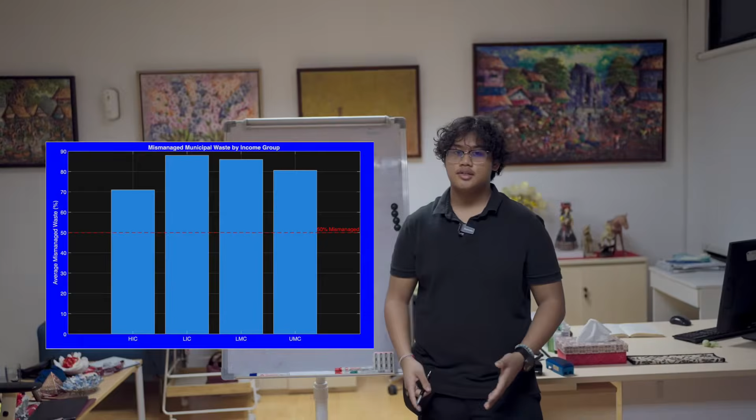alternative. According to the World Bank, low-income countries experience 90% of their municipal waste being mismanaged. Even in lower middle and upper middle income regions, over 80% of waste fails to be safely processed. The exception is only high-income countries, where they consistently fall below this threshold. But they even average over 70% of mismanagement when systems break down. This is not a technology gap, but an infrastructure gap.

Acknowledging this, our mission is simple: to turn mismanaged waste into reliable energy and useful material outputs where conventional infrastructure is short. This mission comes to life through PyroLoop, our modular, decentralized waste-to-energy system. PyroLoop converts mixed waste into power, heat, and more useful materials through thermochemical processes which are designed to operate reliably. This is the system framework that we employ.

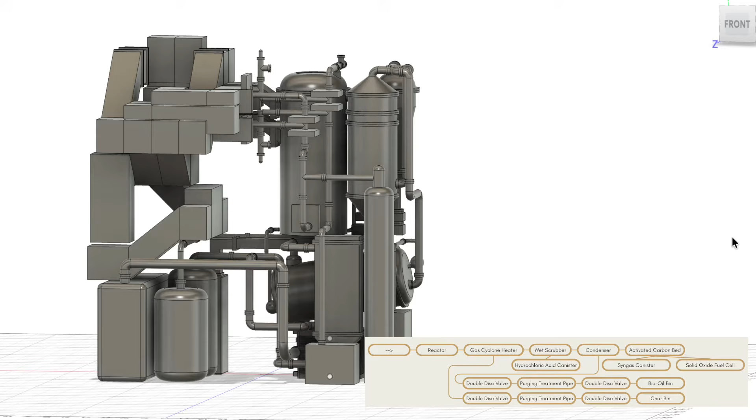From the intake chute, it goes to the shredder and then to the AI detector. This is where the trash gets separated, and then it gets dried, and of course it gets read. That then leads to the processing inside the process chamber. The feedstock enters a sealed vacuum chamber. Oxygen is removed and nitrogen is injected. And knife gates throughout the system ensure airtight isolation, guaranteeing an oxygen-free environment.

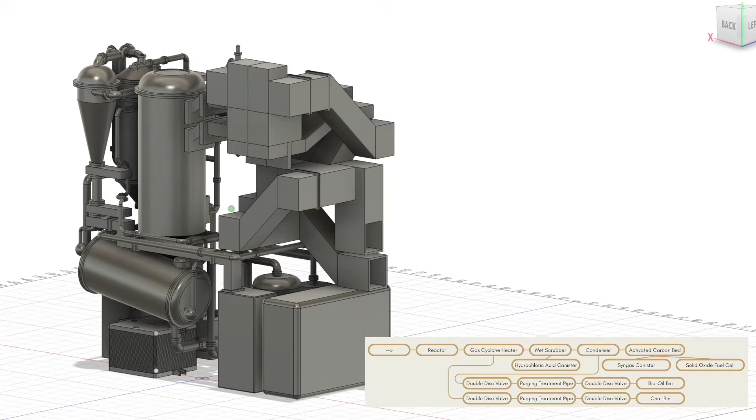Inside the process chamber, the process is driven primarily by our foldable parabolic solar concentrator, which focuses solar energy that is directed into the reactor. Molten salt thermal storage preserves heat, while a syngas-powered rod heater provides auxiliary heating when needed.

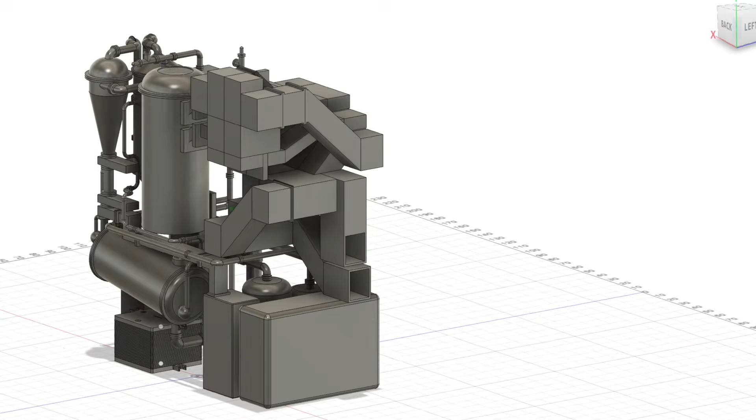The produced gas passes through a cyclone separator to separate char, then a wet scrubber that captures hydrochloric acid. It then enters a condenser where bio-oil is collected, and finally an activated carbon bed, ensuring only pure syngas remains. About 15% of the syngas powers a solid oxide fuel cell. Once a cycle finishes, system data is logged to the app, giving operators instant visibility into performance, safety, and capacity.

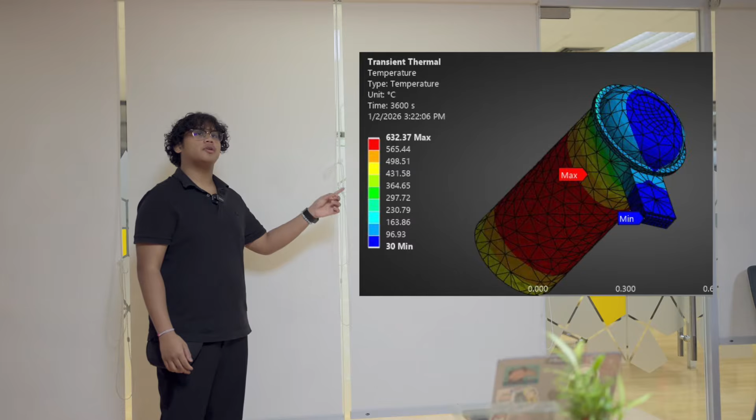The essence of this simulation is that it focuses on temperature behavior inside the pyrolysis chamber. Pyrolysis isn't aimed at reaching peak temperatures, but towards maintaining a stable thermal environment where reactions can proceed predictably. If the chamber develops cold zones, feedstocks under-react. If hotspots dominate, you get degradation and uncontrolled cracking.

Thus, this model shows that the radial temperature gradient stays within a controlled operating temperature across the chamber cross-section. Heat is concentrated where reactions occur, while the outer regions remain cooler, protecting the structure and improving efficiency.

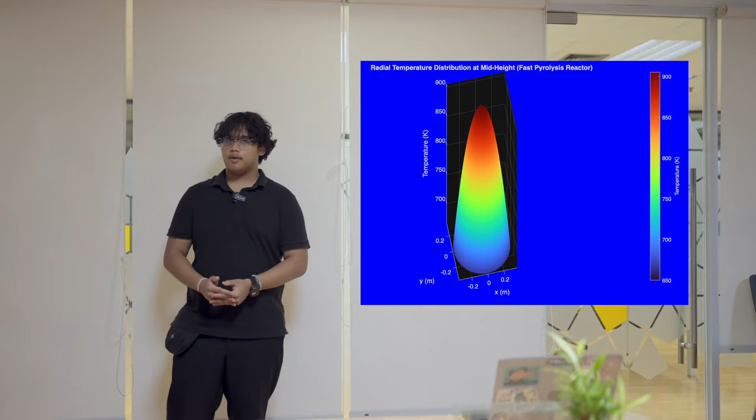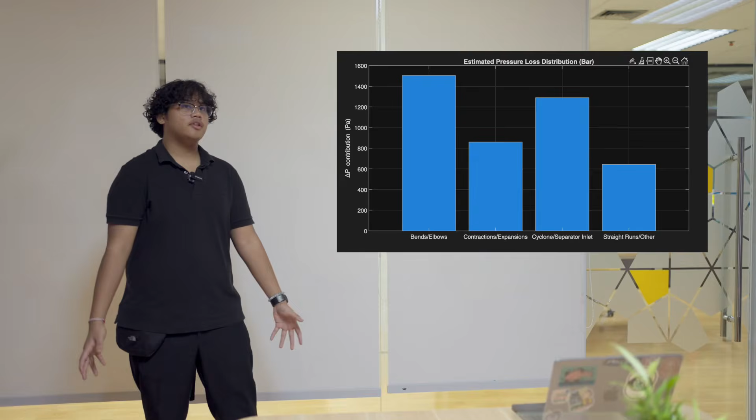PyroLoop's answer is yes. Surplus monetizes byproducts, leasing removes upfront costs, and NGO partners unlock grants and credibility, creating the data needed for climate and carbon funding. We operate in a fast-growing $100 billion market. Key customers include off-grid communities, disaster zones, municipalities, and NGOs. Government procurements, NGO channels, and community leasing mean we scale without relying on one buyer.

Unlike centralized systems, PyroLoop is modular, scalable, and deployable wherever waste exists, thus entering the innovative mass market. Pilot unit cost is about $22,000, primarily the pyrolysis core plus AI sorting, assembly, and labor. Costs drop as production scales.

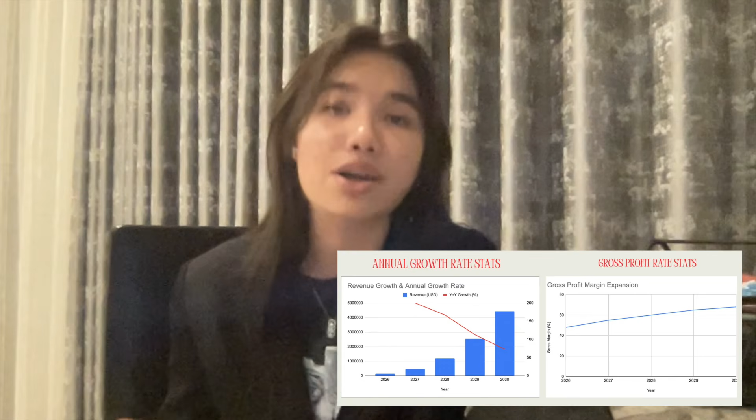As for the pricing, unit price is $29,500, or lease for roughly $1,650 to $1,750 per month with an 18-month payoff, including surplus support. Revenue comes from sales, leasing, and recurring surplus services, with strong margins and improving efficiency as we scale.